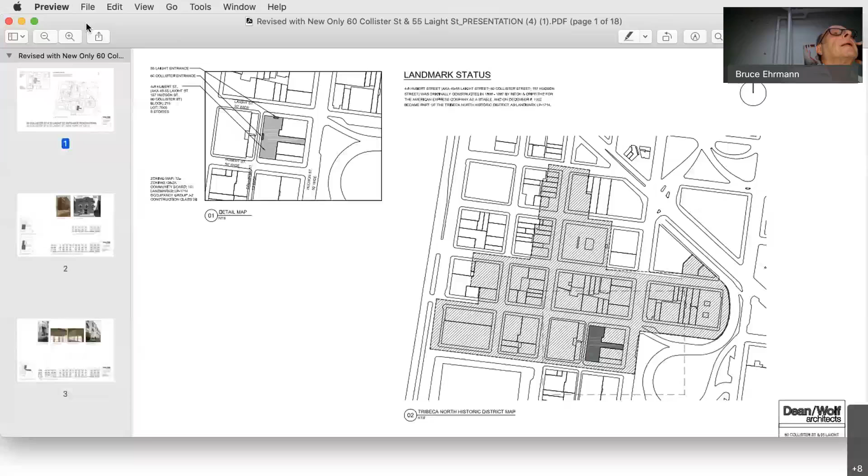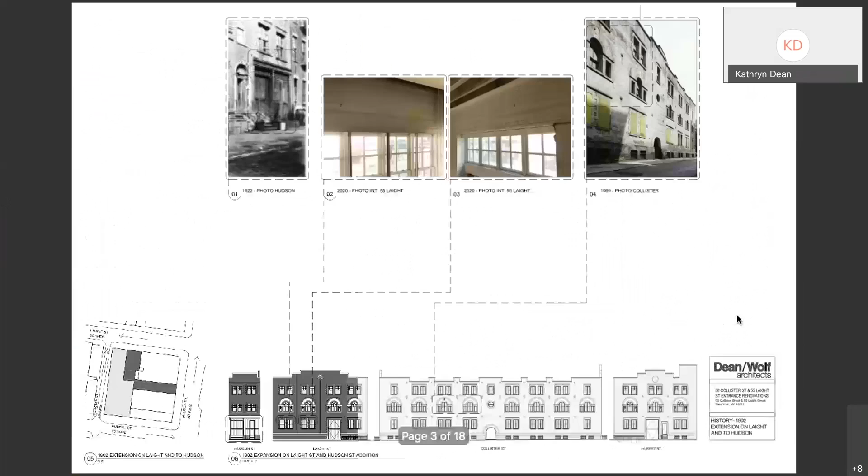Okay, let's scroll down and pass through all of this. Keep going, keep going. Oh, go to the next one. Go to the next one.

So with the canopy, what I had done was what we talked about at the meeting, which was to lower the canopy relative to the line of the double hung windows. But what I've thought about since then was also reducing the scale, from it being 8 inches thick to being 6 inches thick. So I was thinking about changing the 8-inch wide flange section to a 6-inch C-channel instead.

It will be thinner as well. I'm going to investigate with Landmarks about whether they want it sloping or not. One concern I have about it being sloping is they also want it narrower, and I'm a little uncomfortable with a sloping canopy dumping rain into the middle of the sidewalk.

It's already sloping slightly, so it's already going to dump rain onto the sidewalk, but it won't be coming off at a fast pace. If it's sloping downward in any dramatic way, usually canopies that slope down go all the way to the edge of the sidewalk, so they're shedding rain onto the street.

And if this slopes down and gets narrower than what's currently shown here, it's going to be dropping rain right in the middle of the sidewalk. But this is where it's currently at. It's going to get thinner.

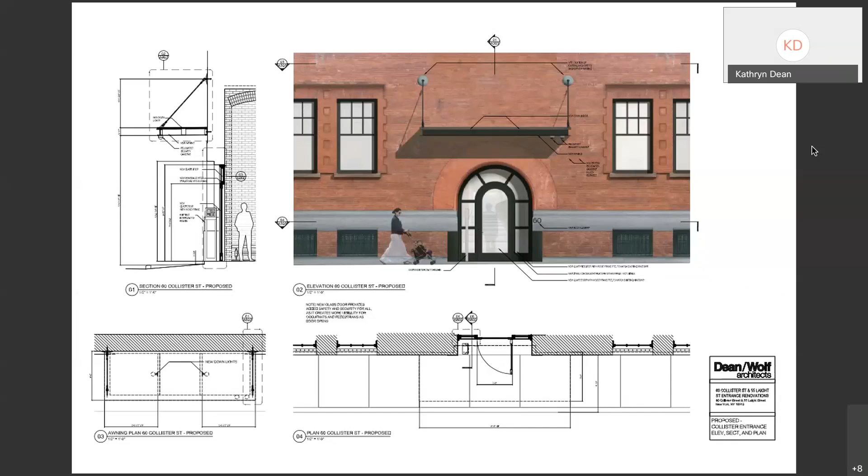Keep going forward. Two more slides forward. One more. Okay, back one.

Here you can see that now the three stiles of the doors are equal and the glass is more vertical, which is more similar in proportion both to the vertical dimension of the glass over the doorway of the garage and the glass in the doorways of the transparent doors adjacent to it. So it's actually more in character with the vertical proportioning of everything, and it reduces the glass on the edges of the doors, and they thought it was better.

It also shows that it is now aligned, which I think is better, that the edge of the glass is aligned with the mullion overhead, so it registers better with the transom.

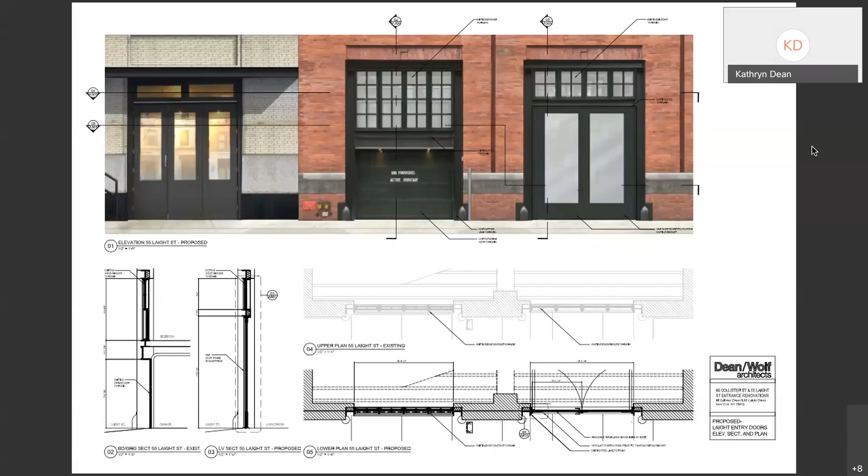Go ahead, go ahead. Go ahead and go to the last slide.

So here you can see with the canopy lowered, it's kind of a more intimate scale with the doorway, and with the glass narrower on the facade, it's more in similar proportion to the windows on the facade on the far right and with the windows up on the third floor.

So those are the changes that I made between seeing you and a second meeting with LPC. They approved the doors on Laight, they approved the transparent door on Collister, and they sent me back because they wanted a smaller scale canopy. They said there was something wrong with the scale of the canopy. So that's where I'm at, I'm to revise the canopy still.

Is it possible to show us the original canopy proposal, or is that too complicated now with various people controlling the slides and so on? I don't know how to do that.

Okay, it's okay. The only way I would know how to do that is if Jennifer has the previous presentation and can load it. So will you describe again the changes in this particular canopy application?

Before we do, if in the event that we write a resolution, I just want to be clear that we are talking about the plaza that never gets completed between Reade, and rather the beginning of what was Hudson Street and West Broadway at Reade and Chambers. Is that correct?

Yes, so that is the Bogardus Plaza location, and Emily will be able to talk through some of the specifics on that location in our slides.

Before we go any further, the official designation was Bogardus Triangle. Is it now called Bogardus Plaza? The reason it was officially designated Triangle was because every other juncture, which is characteristic of Tribeca historically, is designated Triangle, whether it's Barnett Newman Triangle or the one on West Broadway and Varick and Franklin, whose name escapes me at the moment. But have you changed it to Bogardus Plaza?

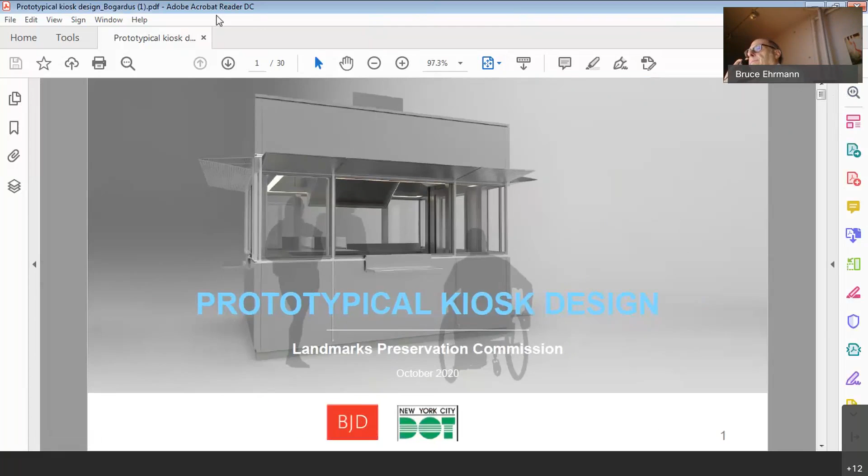So just to clarify, we are talking about the DOT public pedestrian plaza for this kiosk location, but Nick or Emily may be able to add a little bit more color to your question about Triangle versus Plaza during our presentation. Thank you. Go ahead. Beautiful.

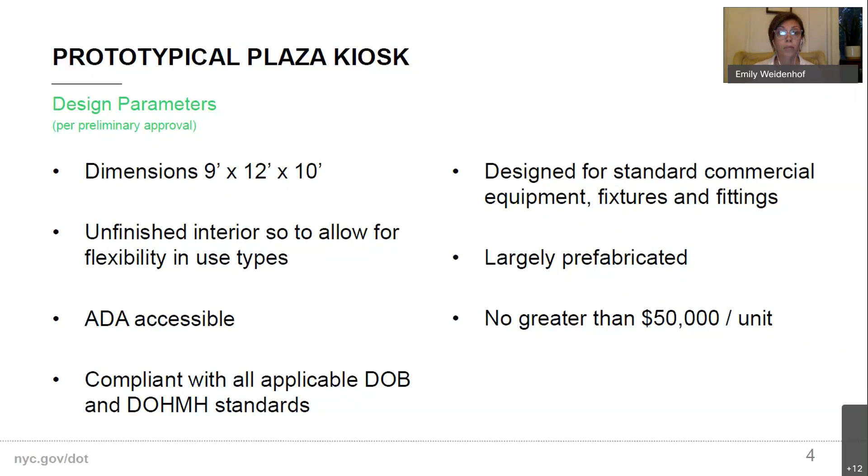We researched a lot of kiosks across the city, what was working in public space, and came up with a standard design that met a lot of the food service and retail requirements for a space. The finish of the interior of the plaza is raw and will allow for a retailer to come in. The kiosks are ADA accessible. We really worked to make sure that we could keep the cost down for our partners, and work to coordinate with our sister agencies, Department of Health, Department of Buildings.

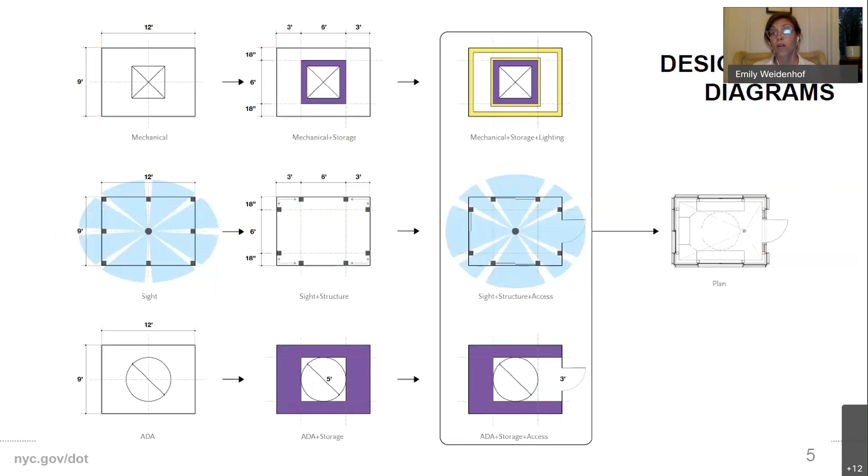The real goal and concept of the kiosk is that our plazas are 360-degree spaces. People enter and walk past them and through them really at all directions. There are very few plazas with a backside, and so we really worked to design a kiosk that could be accessible, and certainly visually pleasing from all directions. That was also paired with our standard set of street furniture.

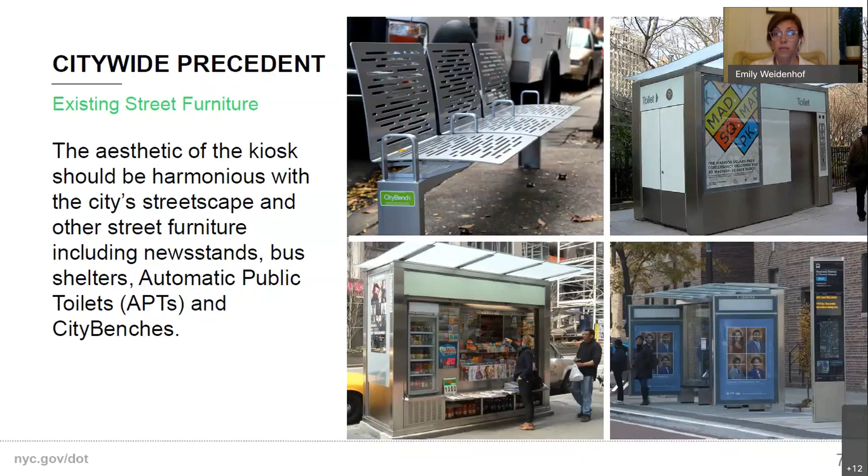We actually worked with Billings Jackson, the designer, a member of the design team, on our street furniture toolkit. We wanted to make it feel part of that New York City family. Who is that principal designer? Would you say the name again slowly?

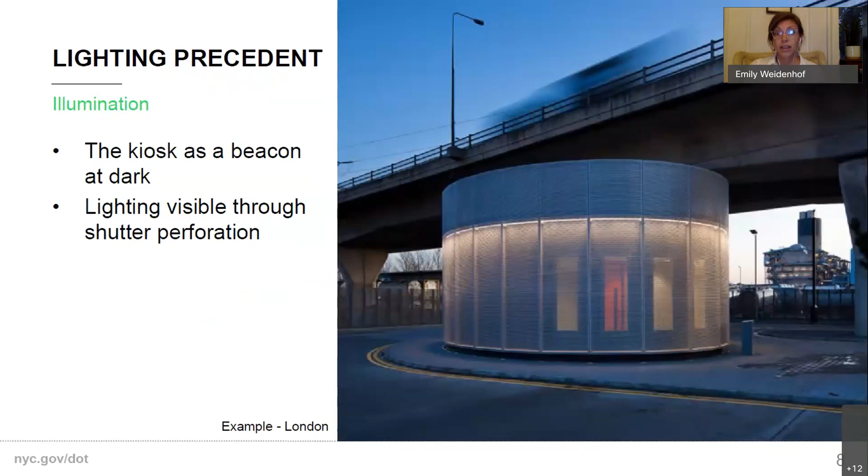Sure, it's Billings Jackson. Another really important piece of the kiosk is that when it was closed for business, we didn't just want it to be an empty box sitting there. We saw it as an opportunity to create additional lighting, thinking of the kiosk as a lantern at night to provide additional space and public safety. So with that, this is our kiosk design.

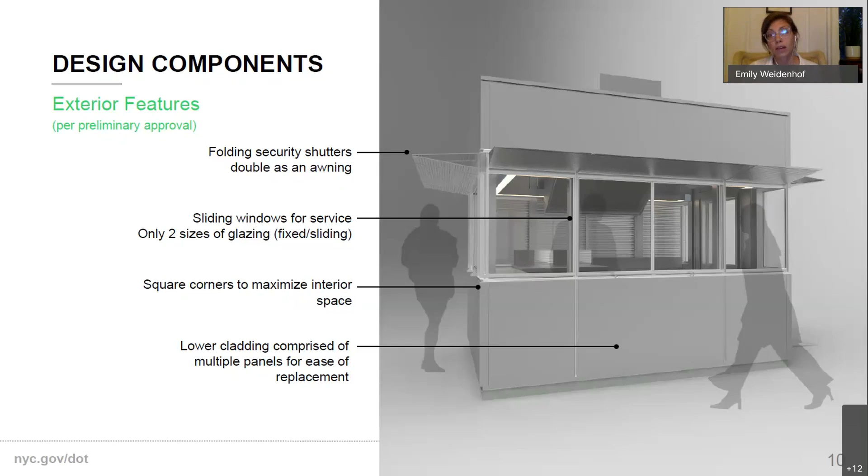It's a stainless steel structure that has folding shutters. It has service entries on 3 sides, which really allows for flexibility for operators to think about pickup or ordering windows and pickup windows, allowing for the greatest flexibility. We worked to use a material that was very robust and easy to replace, and also worked to standardize the sizes of the panels, so maintenance could be easy and affordable, and we could keep these things looking great well into the future.

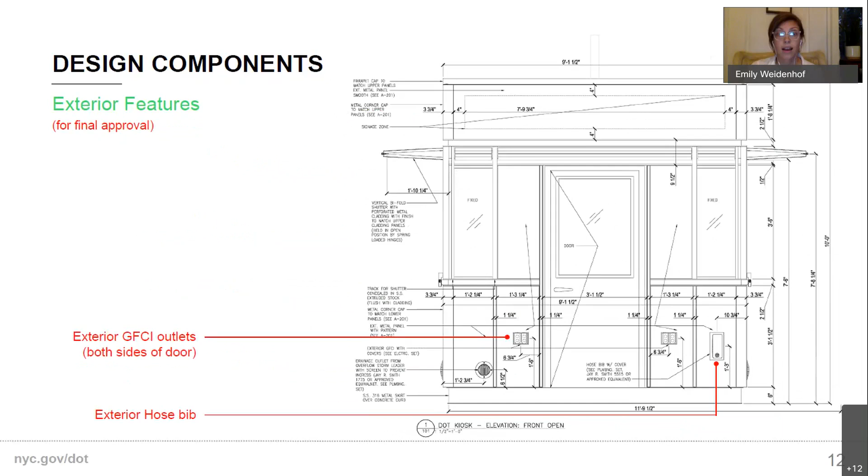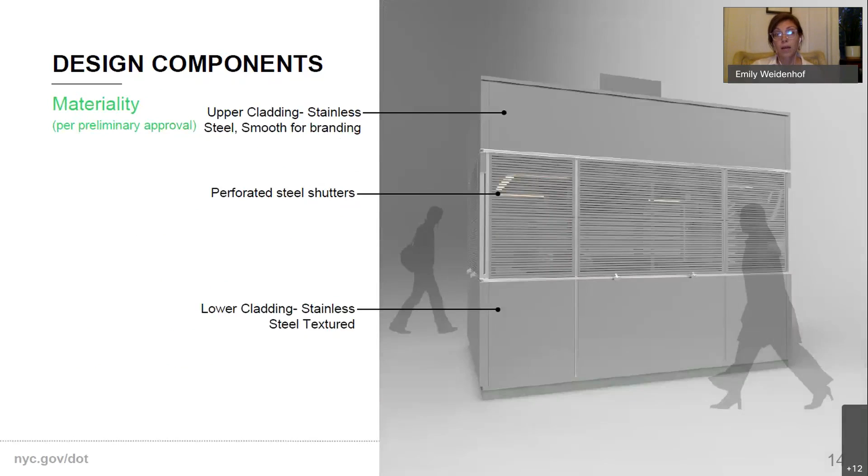Also, the stainless steel at the bottom has a texture to deter graffiti. Here you can see some of those samples up close - still a picture, but you can see the upper cladding, the shutters with the perforations, and the textured steel for the bottom panels of the kiosk.

Can you leave that for a second, please? Leave the last slide for a minute, please. Thank you, yep.

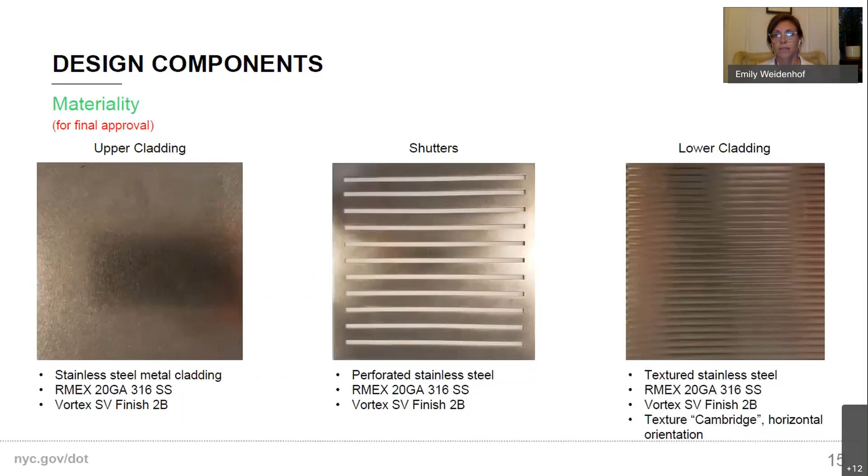Hold on - I think another idea that came with the textured bottom panel is that that's the panel people might bump into, might get dinged up a little bit. So having that texture helps keep some of those dings fade away into the background.

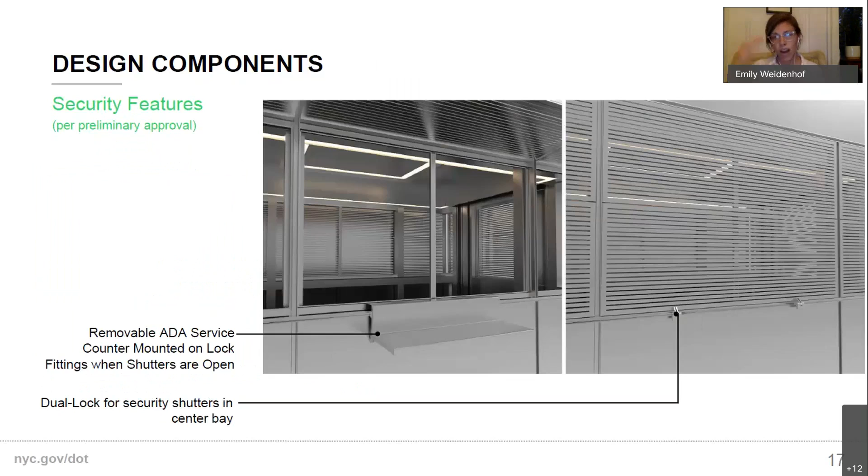Thank you. Like I said, the kiosk is ADA compliant, so both the height of the shelves and the windows, as well as a ramp element that can be added on for someone operating or working the retail facility. Here you can see the shelves that actually get taken in, so nothing is sticking out of the kiosk when it's not in use.

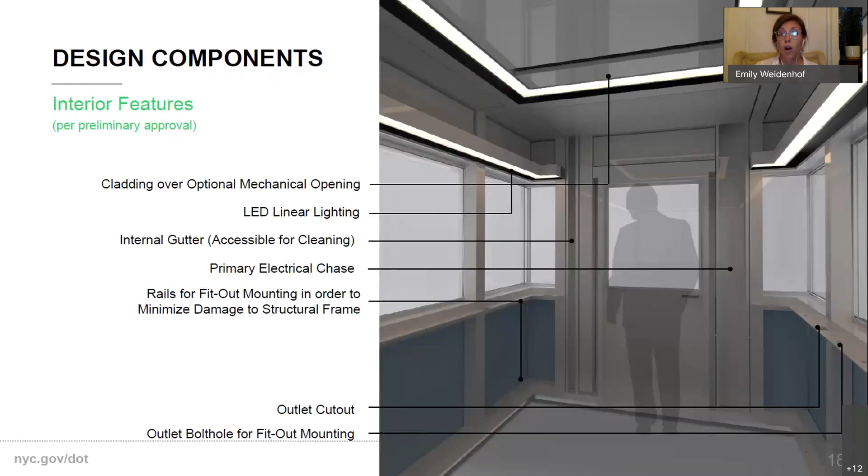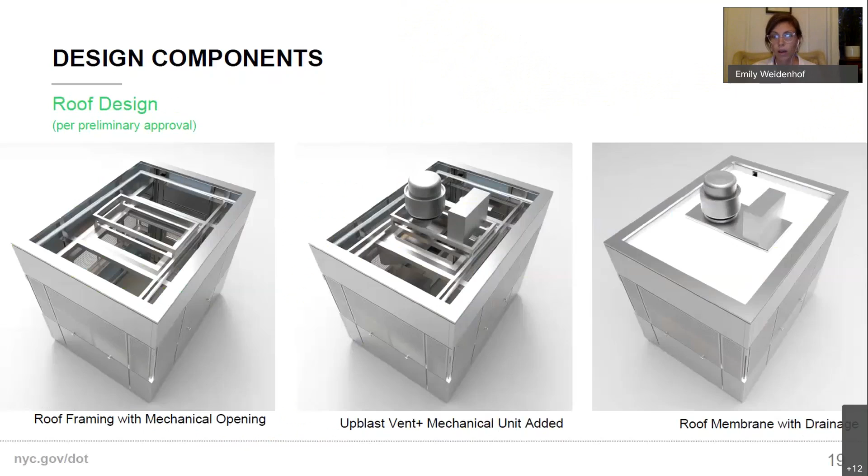Here's a shot of the inside. Again, very open and raw so that each individual business can come in and make it their own and outfit it for the way they need it. The lighting is included as part of the design, and here you see the framing of the roof includes the ability to add air conditioning and other types of cooking equipment should that be necessary.

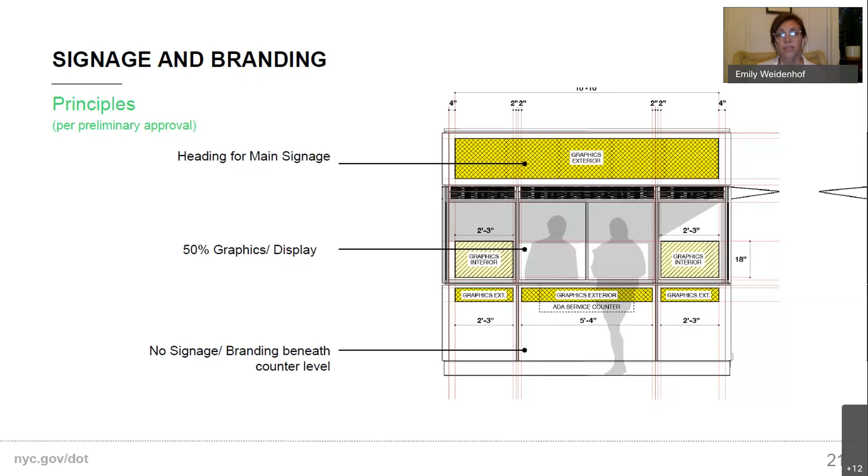Another really important component is thinking about the signage and the branding. Part of the kiosk design includes a set of guidelines about where signage can go - mostly the top panel, visible from far away, with some secondary graphics on that middle glass panel. We never want it to cover more than 50% of that area to maintain transparency. Lastly, a third subset of graphics - so you can imagine the brand, the menu, and maybe some additional graphics as necessary.

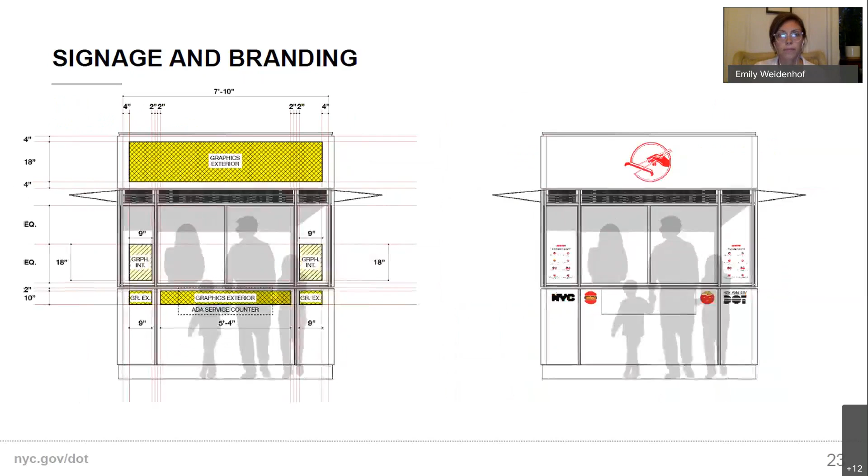This is a view of the side of the kiosk. Here are just a couple of other examples of what branding might look like.

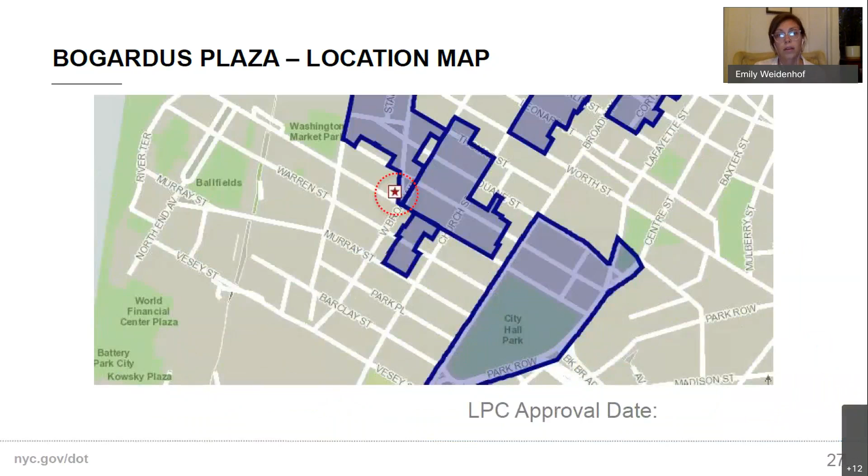If I may interrupt, at the last Quality of Life meeting they said spring - that was 2 weeks ago. This week they're saying November.

For a substantial completion, which means that is their majority. I'm sorry to interrupt you, and I do want to hear the rest of it. But...

For the neighborhood, what has been happening at Bogardus Triangle over many, many years is at the point where most neighbors that I speak to wish nothing had been touched. It has been so delayed, and it is so disruptive, and it was quite pleasant before. Now it's a wreck. I do not, in its transformative state, it's been a wreck for a long time.

It also has disrupted tremendously pre-existing businesses. For instance, the one that we can see here, directly southwest, that business is gone. King's Pharmacy Northwest has suffered because of this construction. I appreciate your wanting to add another source of revenue, but I would like to keep the local businesses that are losing revenue also in business.

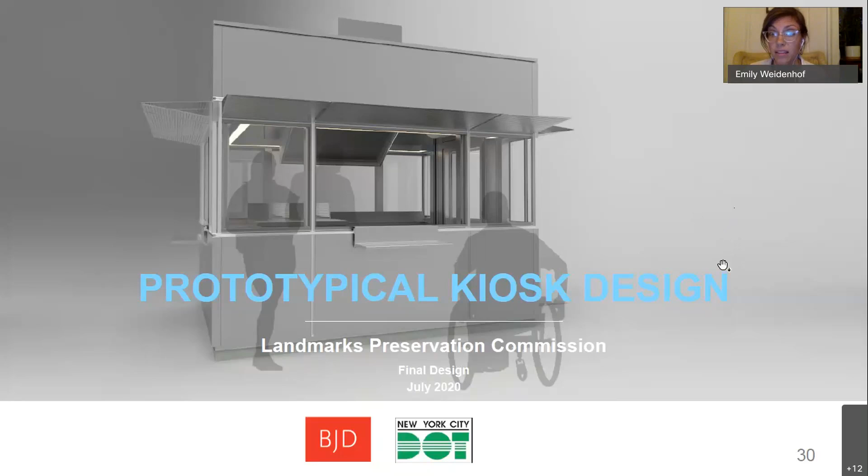Someone is here from the community group that has been helping with or spearheading Bogardus Triangle, and you've been with us before regarding a clock. Are you? Who is it, and are you here? I guess not. I thought Jennifer introduced someone from Friends of Bogardus Triangle, but am I mistaken? Yes, Victoria Weil from Friends of Bogardus Garden is here. I don't believe she is a panelist, I believe she's an attendee, so I'm not sure if she can actually speak. I would love to hear from her.

She's muted, if that's possible, Jennifer. Is it? Jennifer, can we unmute her? Is it possible? Jennifer, are you with us? I don't know. I don't know, but I do know this platform has to be corrected between now and the next meeting. We've lost Jennifer, I guess. Okay, Bruce, I'm here. Oh, can we unmute Victoria from the Friends of Bogardus Triangle? Is it possible? Yeah, I can unmute her. One second, okay.

So first of all, I'm 100% with you. This has taken so much longer than I'd been told, than any of us anticipated. It's been extremely frustrating and painful, especially as the face of Bogardus Plaza. I feel like I've just been misleading the community when I'm like, it'll be done, two years ago. I mean, anyway, it's been really frustrating. So I hear you, it's a tricky area.

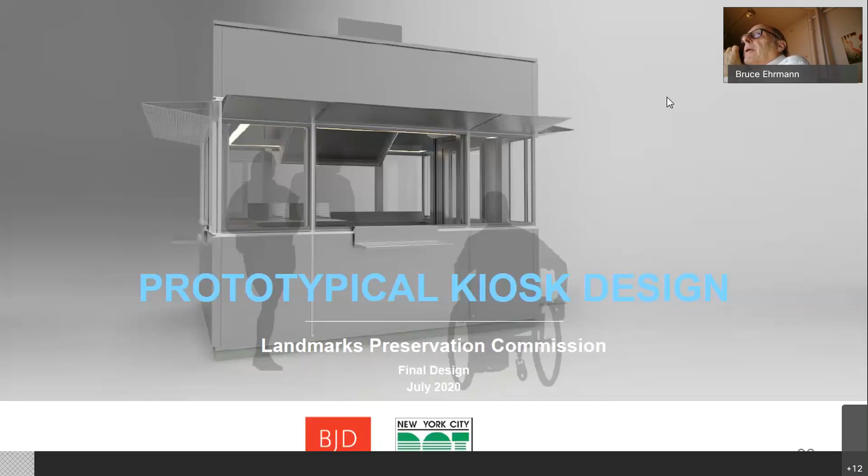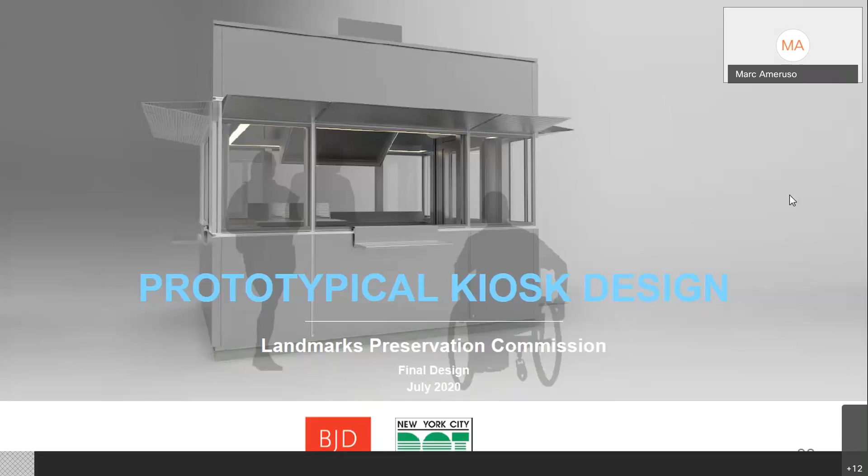The kiosk is now going to be a permanent structure, is that right? Yes. So if I remember way back when, this was a temporary thing or something like that, I thought there was not going to be any permanent structures on the triangle. I kind of remember something about that. You're right, Marc, I think it's about the subfloor, like what lies below it. So it will sit on top of the plaza, so it can be removed in theory, because it does sit on top. There are connections underneath, there's a sort of little vault that has the connection for electric and water and waste, but it's not built in. It kind of lands on top, and I think that's the difference.

So there's actually sewage or water lines underneath? Yes, there will be. So if that's the case, as opposed to just having a box set up with electric lines running through and an air conditioner, this is opposed to what we were told. This is supposed to be temporary, but I'll get into that again. I have an issue with the permanence of the kiosk, the way it's being built. That's not what we were told initially.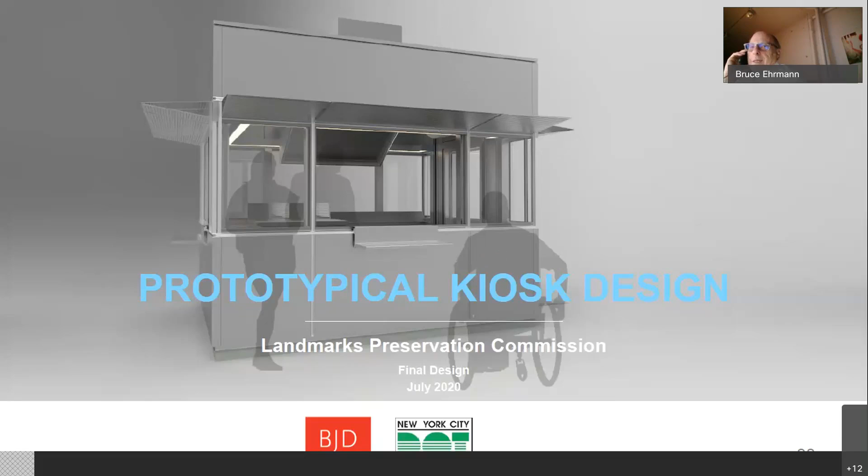Vicky, thank you, Mark, and thanks for that recollection. Vicky, are you still there? I am. No comment at the moment. Thank you. Oh, I didn't hear what she said, but Jason? At the moment, I agree with Mark, but no comment at the moment. Thank you. Okay, Jason?

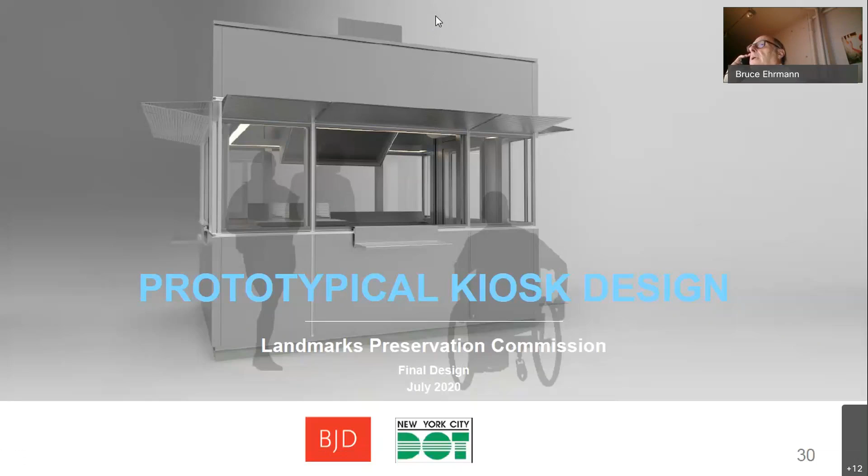I was wondering, what about advertising for the kiosk? It looks spare of any sort of signage. Is there going to be signage? No, there was a very big signage presentation. Can we go back for Jason? Oh, I'm sorry, all right. In that rendering though. Oh, okay, that's fine. That's fine, okay, I'm okay with that. Makes me want a hot dog.

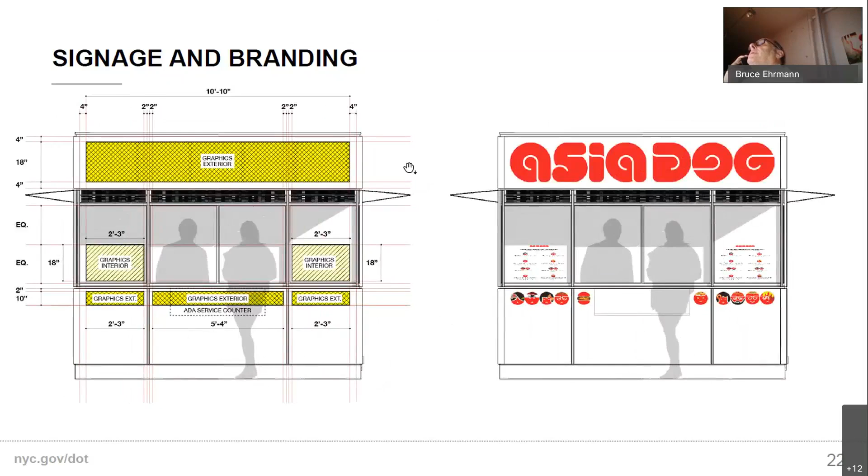Did I miss anyone on the committee? It's hard for me to see. Christina is not on the committee, right? No, Christina and Nicholas are not on the committee. Okay, well, that's correct. I'm going to have to step in because everyone else is being reticent.

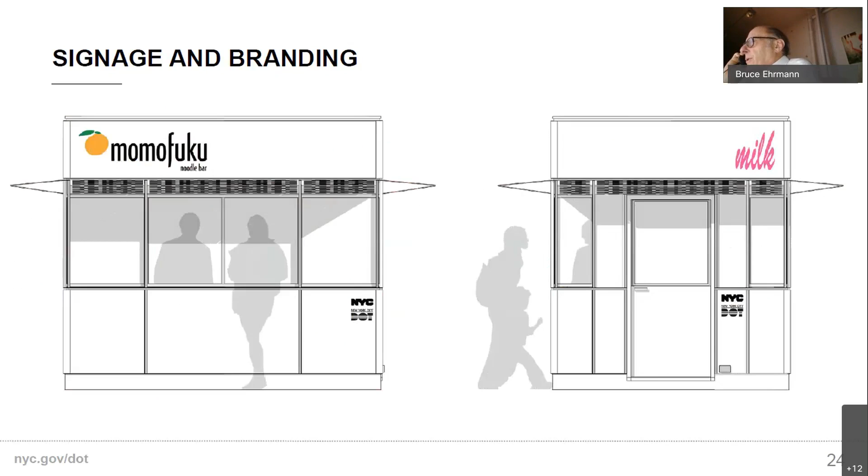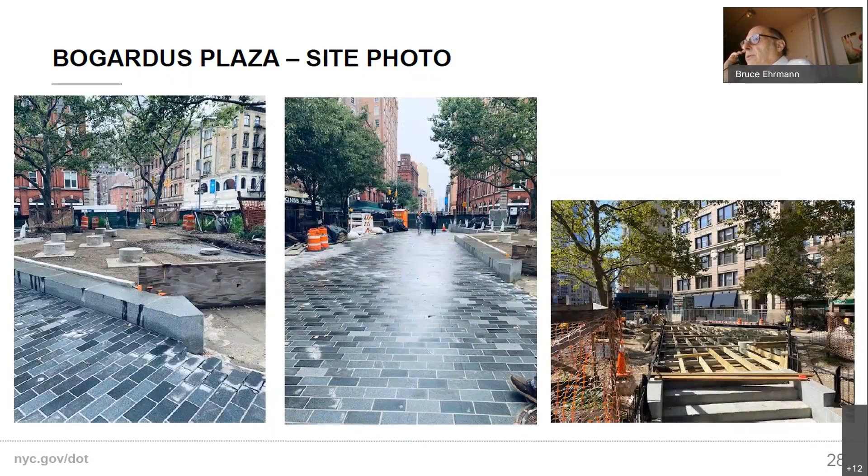I want to support the Friends of Bogardus because the Friends of Bogardus are residents, some of them longtime residents. I'm glad to hear that King's Pharmacy, which really struggled at the beginning of the shutdown, is on the board. I have very mixed feelings about this. One, because I always relate public works projects by the DDC in terms of the lifespan of students.

And since this has started, we have had students starting high school who are now in college, and it's still not done. The contractor, I spoke to some of the contractors recently, and they drew a complete blank as to when they'd be done. It was very compartmentalized, thrown into the same basic hopper as the reconstruction of Worth Street by DDC at the Quality of Life Committee. And famously, the contractor there told residents that at this point it's a license for the contractor to print money, unquote, and that's a direct quote.

And I fear that that's what's happening here. And without the pleasant enjoyment of the community of this space, and it's getting embroidered and embroidered and embroidered, I don't feel right about supporting this until I actually see something. To my eyes, the kiosk looks like a meteor set into this beautiful, perhaps overly ambitious plaza compared to what it was. And I don't like the 50% signage. And I'm really surprised that this new feature is being presented, since this little plaza has been worked over and worked over.

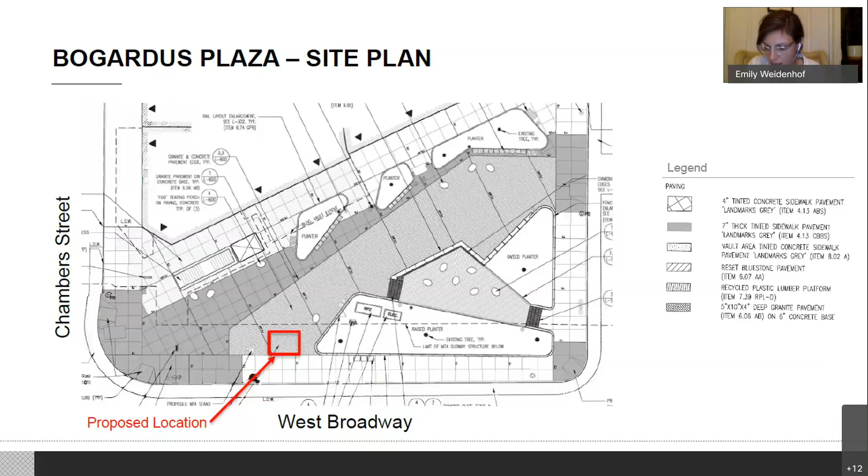We will be presenting this to the landmarks committee. I would look to my colleague Nick, who is our landmarks liaison, to confirm exactly what the role of the board is here. So we are planning to present this to the Landmarks Preservation Commission. We're currently working with staff to review this location as well as a couple other landmark areas, because this is a citywide prototype that has been approved by the Design Commission, and the agency's goal is to get approval for its use citywide. So we are here to solicit the board's feedback ahead of that ultimate public hearing at the commission.

But you don't have a date for the hearing, is that correct? We have not finalized what meeting date yet. We're still working on that.

I want to propose something. Bruce, can I just say something? I think if this is a citywide solution, then it's a simple resolution for us, which is we don't support a citywide prototype thing to plop down in our very beautiful plaza. And that's where I stand on it. It's obviously then not being thought about on the ground. It's just some sort of thing that's being plopped in that can work for everything, and I don't think it works for everything.

I agree. Thank you, Jason. I agree. All right, so let's close. I think it's odd for the Landmarks Committee of Community Board 1, which is specific to downtown Manhattan, to support a kiosk that was designed to be contextualized with the bus stop across the street, and a kiosk that will be, I don't know, on the Upper West Side or in Astoria, all fine neighborhoods, but not ours.

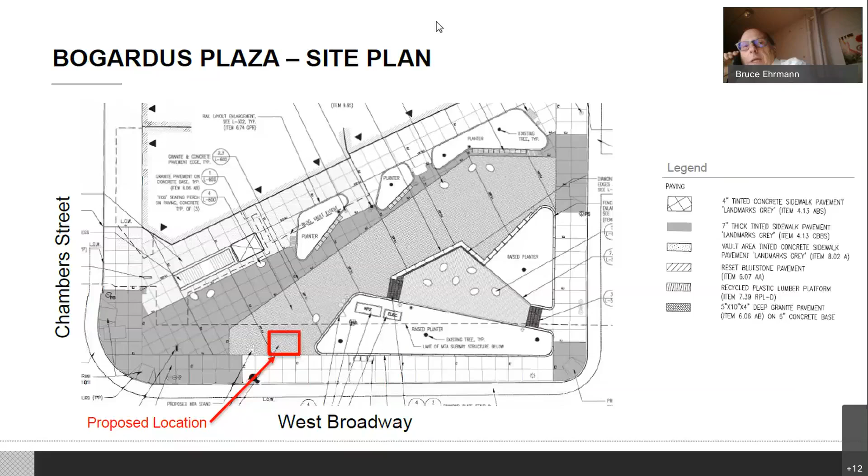So committee, whoever's left—I've talked so much, probably everyone's gone to sleep. Do you agree with a resolution? The resolution would be that we are approving a kiosk. We appreciate the Friends of Bogardus wanting a source of revenue, and I will go into what we object to in terms of the current design, and I will add a footnote regarding the fact that we had been under the impression that this was temporary.

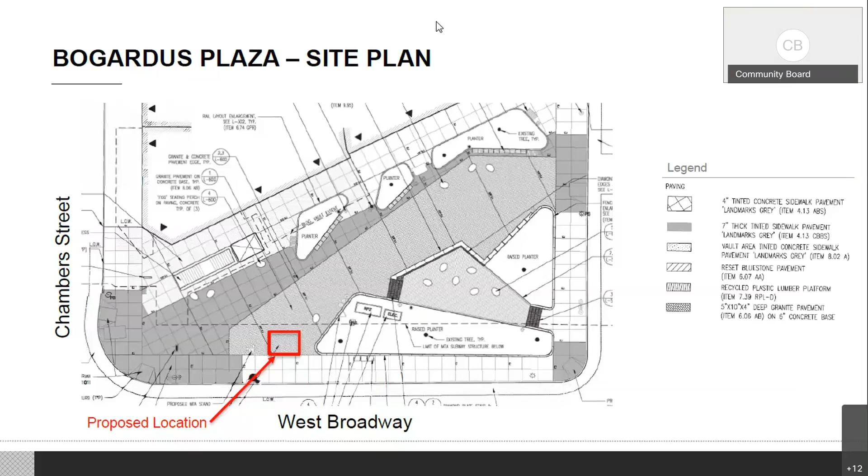I think you can. Jennifer, I completely agree with the chair. I do too. Jennifer, can you go around the table with the vote? If someone can call the vote, someone else second, please. I'll second it.

Bruce? Yes. Jason? Yes. Mark? I'm going to abstain. Vicky? Yes. Susan? Yes. Elizabeth? Yes. Vera? Yes. And Chow? Yes. So the motion passes.